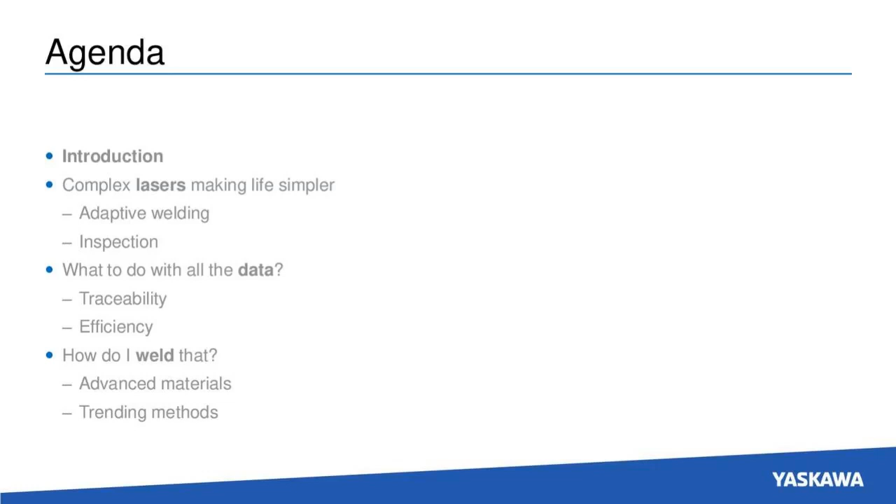So today's agenda: I'll do a quick introduction, and we're going to talk about complex lasers making life simpler. That's going to be in conjunction with adaptive welding and inspection. Then with those lasers and other equipment, what to do with all that data. OEMs are looking for traceability, and how to better make your line efficient. We're also going to dip into artificial intelligence and machine learning with that data. Lastly, we're going to talk about how to weld that - we'll touch on some advanced materials we're starting to see in the marketplace, and methods to join those materials.

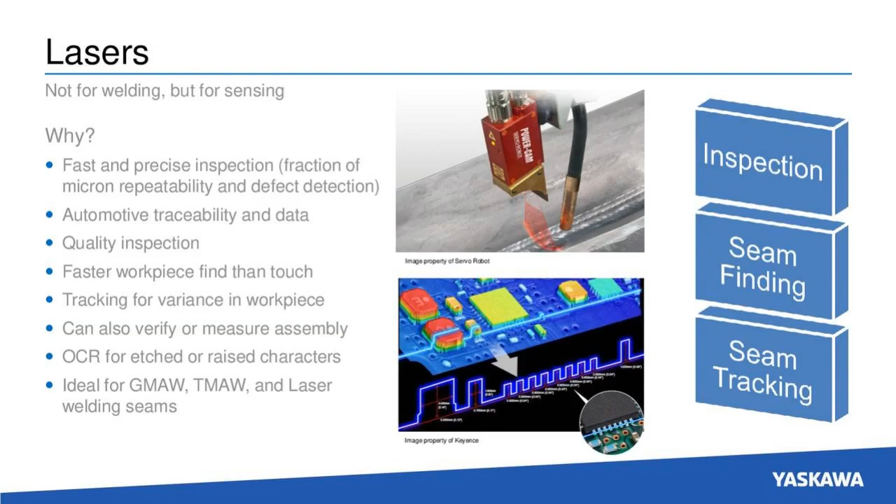It can also be used for verifying or measuring assemblies. You can see at the bottom here, the image showing the PC board. If there's a part that's missing, or if I have a box going down a line that's missing pieces inside, I can measure that with a laser to determine if a part is there or not. This is also ideal for just about any arc type welding or laser welding when you're trying to find the seams, track the seams, and measure those seams for quality.

So on these laser sensors, looking at the specifications, again I mentioned they're down to less than a micron of repeatability. It's the same laser used for inspection and measurement as it is even for weld line verification. Typically, it's going to be red, green, or blue lasers.

The blue and the green are relatively new to the market, and they aren't affected by the weld pool heat reflectivity. That infrared heat in the weld pool used to be very hard to track with a red laser without a lot of fine tuning. We can get around that now with blue and green.

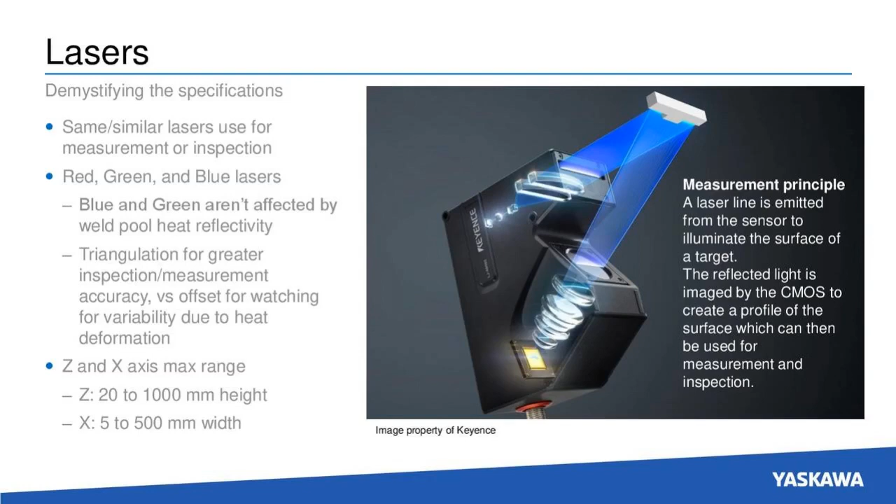They work by triangulation, figuring out what angle it's reflecting that laser back into the sensor at, to determine what it is that it's measuring and finding. You have a Z and X axis max range, typically from 20mm to about a meter in height, as wide as half a meter in width. So you can go from very small parts to very wide ranges of parts with these.

So here's a case study with laser inspection to give you an example. This was working with BWI, who's a strut manufacturer, shock manufacturer, and they chose a Vitronic brand laser. Now these lasers are mounted on the robot arm with the torch and the rest of the ARC equipment.

They grade each of these welds with these lasers after the weld is complete, but before the weld's even done, it verifies that the part's in place and that it's actually the correct part. If it's not the correct part, it'll sound an alert, give you a red light to show a no-go situation. But then after the scan, they get a grade. You can kind of see the HMI presented here in the middle of the screen, and it gives them a grade on each of those welds.

And they're looking for the profile, the length, the undercut, porosity of the weld, if there's any whiskers, cracks, and if there's excessive spatter. So that data is then stored for that weld, for that part. If the part is actually bad and it determines it does not meet those conditions, the weld torch actually comes back and blows a hole in the part. So that part is deemed useless, and then it tracks that the user, the operator, actually removes the part and then places it in a discard bin.

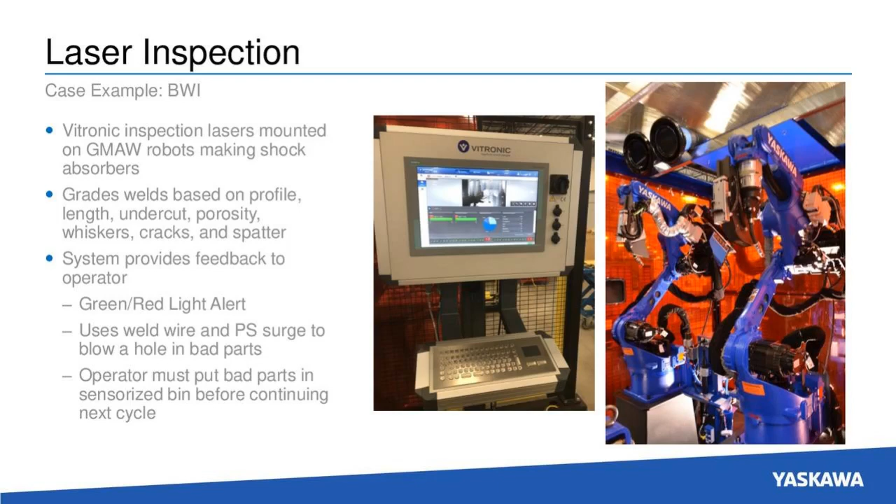So we have a video of that on this next slide here. Let's get these queued up. And it'll start playing in just a moment.

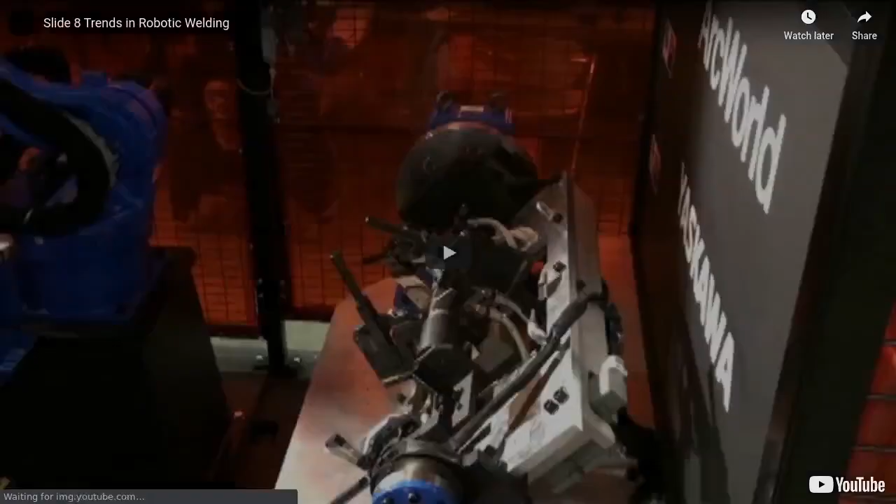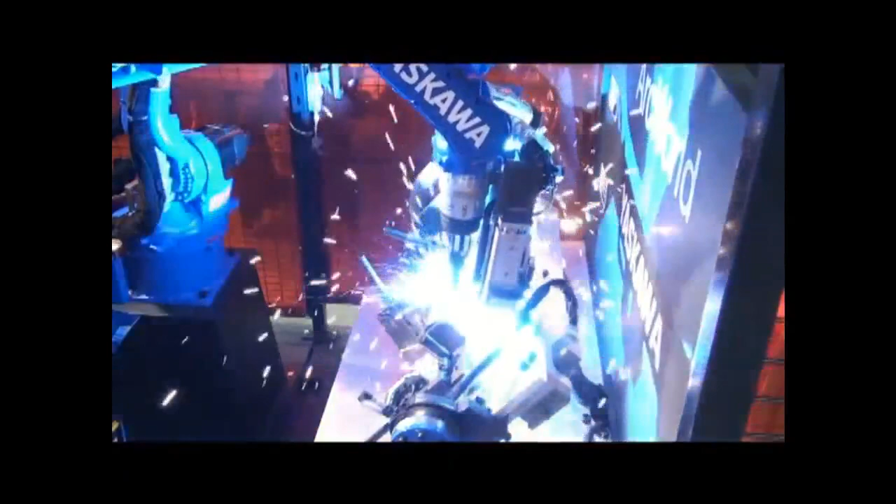So again, we see the part in place. This is on a small positioner inside the cell. We'll see the robot come down. The door of the laser opens briefly, checks the part, which was very quick, kind of hard to see in that video angle. The weld's made. Laser again comes down, inspects the weld on each of the robot arms.

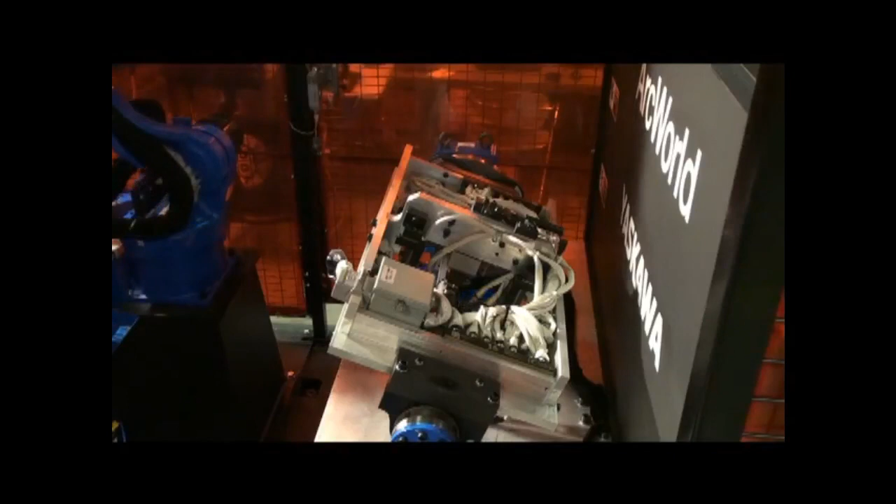And because this was in teach mode here, the positioner is running at a reduced rate for safety reasons. And then two-sided tooling actually comes back down inside the tooling. You saw briefly there a red beam before the arc started to verify the placement of the part. And then the arc, of course, starts to weld the part. And then we just had the second scan there on the other side. So at that point, the HMI would deem that those parts are good or bad.

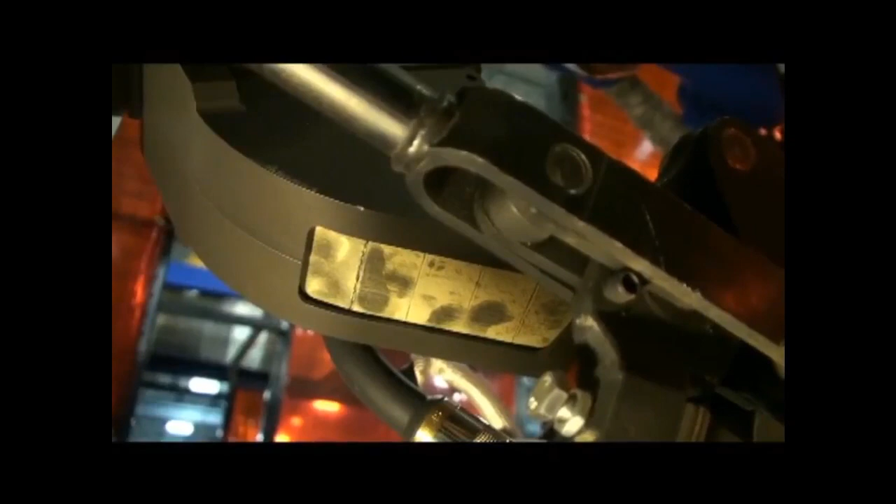And in a moment here, we'll see how those shutter doors work in this situation, because those sensors do need to be protected from that weld spatter, especially in a heavy welding environment. These are smaller parts, so again, just being more cautious when it comes to utilizing those shutters to protect the laser. Got another weld here. Here you can see that shutter and see what that beam looks like. So again, very quick process overall.

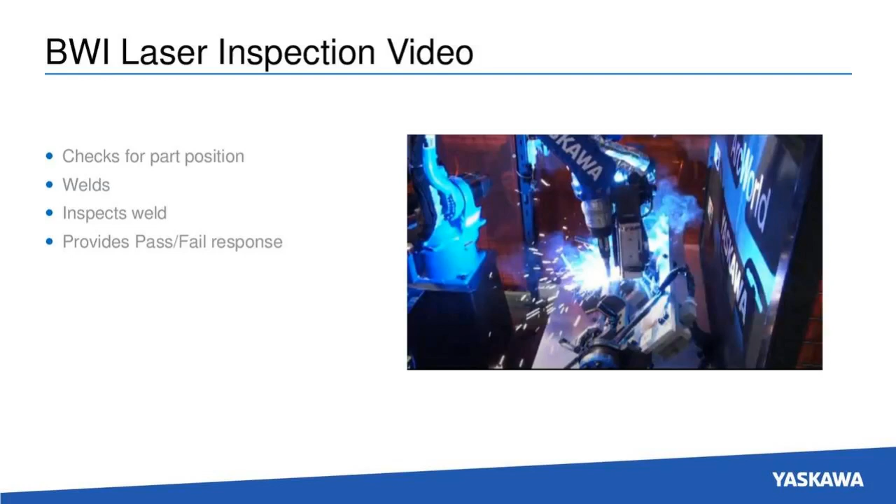To get back to our slides. So again, it checks for part position, welds, inspects the welds, and provides that pass-fail response.

Also, you can use this for part inspection, so not just welds, but checking parts are in the correct place in an assembly. So if I have different studs, for example, that come through, or screws that need to be present on this weld, I can track each model to determine yes or no, are those parts in place, and is this good enough? That's one of the tricks in this, though, is with any inspection, what is actually good enough?

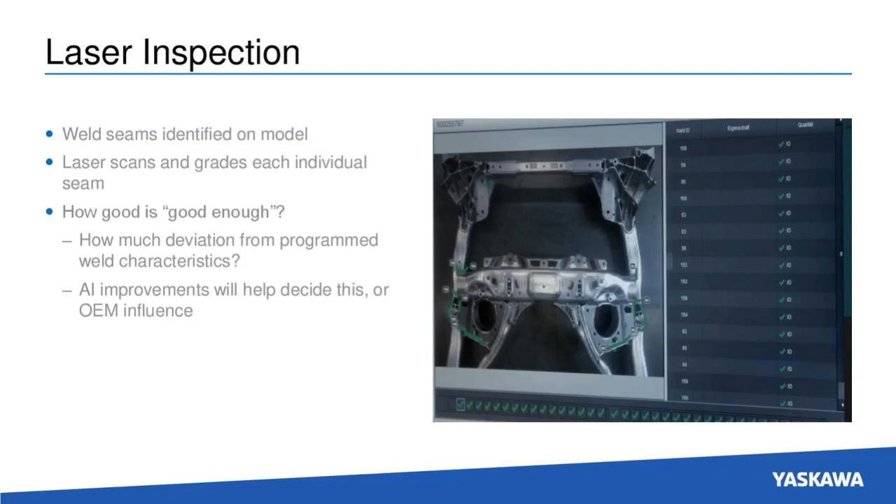So if I'm doing manual welding with a semi-automatic gun and I see my weld, I can kind of judge, because I'm a trained welder, if this is a good weld or a bad weld. Is my undercut right? Does the porosity look right? With the computer measuring everything, and because that laser is so precise, how good is good enough, or how bad is bad enough that I want to reject that part? So that's where some of the artificial intelligence comes into place to help the user decide, but also under OEM influence. I think we'll see more parameters coming from those OEM automotive manufacturers in the near future to help us determine, again, what is good enough.

So with those lasers too, we can do what we call adaptive welding. That could be as simple as that wire touch sensing, to a little bit faster with a pinpoint touch on the laser, more simplified laser. We can use camera systems, or we can use, again, like what we saw with that laser sensor before. And that is to find the seam in place to make sure I'm starting in the correct position. And then I use a relative job function to actually shift the entire job point to be in space where I need to be to complete that weld job.

On the other side of that, we have what we call seam tracking. I can do two different pieces here, using that laser, what we call on this slide the MotoEye LT, to actually track if that seam is changing while I weld. So if I have any heat deformation while welding, the relative job and the shift will actually affect the weave and jog of the robot as it's welding.

I can do the same thing also through Com-Arc, which is arc seam tracking. I'm actually measuring the gain and drops in voltage and current to make sure I'm staying tight inside that weld seam.

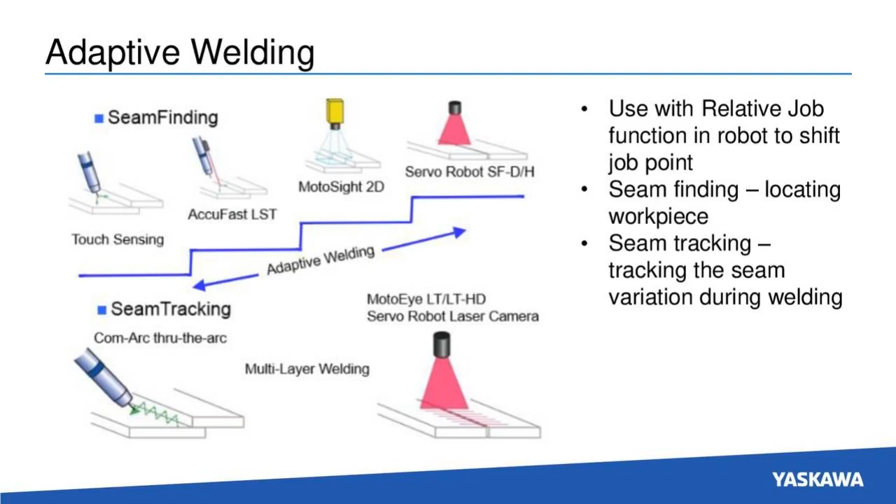So we have all that data from the lasers. I have scans of the welds to make sure they're good or bad. I have information coming out of the robot controller and other equipment. What can I do with all that data?

You're probably familiar with the Industrial Internet of Things, or Industry 4.0. This is bringing together all the factory automation we've worked on for a couple decades into more of a smarter space. All of that equipment is creating data. It's giving me process times, part counts, weld parameters, and consumption rates of consumables. So I break that into 4 sections here, as you can see in this graphic.

If I look on the right, efficiency. Are my machines running efficiently? Are they doing what I think they're going to do in a day when it comes to cycle times and part production? I can also look at uptime.

It could be an efficient machine, but if it's constantly having to stop for some reason, be it maintenance or operator error, I'm losing money on any of that downtime. So I can prevent that downtime and ensure uptime with that data.

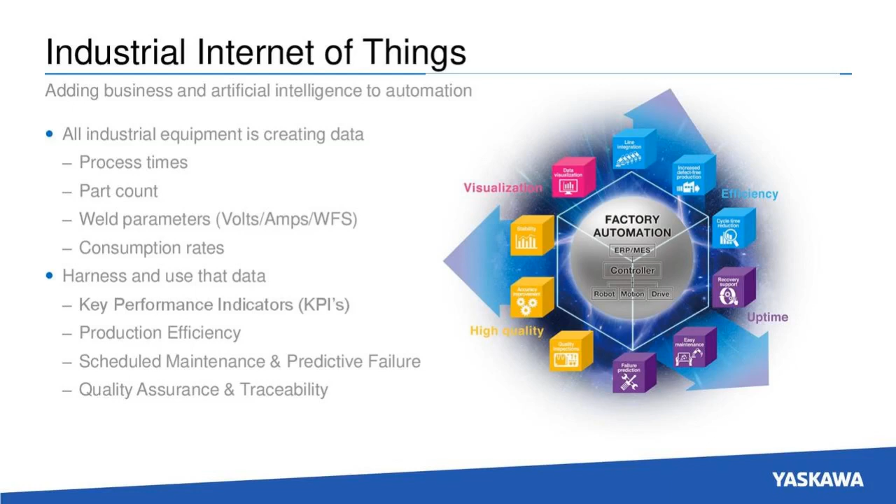I can also measure quality. If I'm scanning parts and determining if they're good or bad, I can give myself quality assurance on those parts. I also provide visualization through this data. Just as you're used to seeing charts and graphs of performance, I can visualize that data from my machines in different charts and graphs to achieve different KPI targets.

To give you an idea what that would look like, Yaskawa's product for this is called Cockpit. There are lots of different industrial products out there though. They all kind of work the same. One of the major differences is whether that data lives locally or if it's always sent to the cloud. In the case of Yaskawa Cockpit, it is locally stored and then sent to the cloud as needed.

So in this case, we have an assembly line. You can see the controllers, the robots, servo motors, AC drives all being used. All that's creating data, and all that data goes to Yaskawa Cockpit. Cockpit collects that data on a server, and then I can at that point either execute on that data or send it to the cloud for further application.

So execution at that point might be defect monitoring or preventative maintenance, for example. If I know a servo motor runs so many hours and is going to need lubrication at some point, I can have planned downtime for that lubrication.

With that data, I can do the analysis and monitoring locally or send it to the cloud. With the cloud, I can implement something like IBM Watson or other analytics to determine if something is up to par that it needs to be. If it's not, what tweaks can be made based on the data it's seen in the past. So if it noticed that a parameter changed versus a cycle time change, how do those influence one another, and how do I make changes to my production to increase production overall?

That also can come into play with machine learning, which you've probably also known as artificial intelligence. So if I have a scan of a part and that data, I can send it to the cloud. If I have an algorithm and artificial intelligence in place that determines how to weld that part based on the shape and size of the seams, it can also then generate a program, perhaps, and send that back down to the robot to execute.

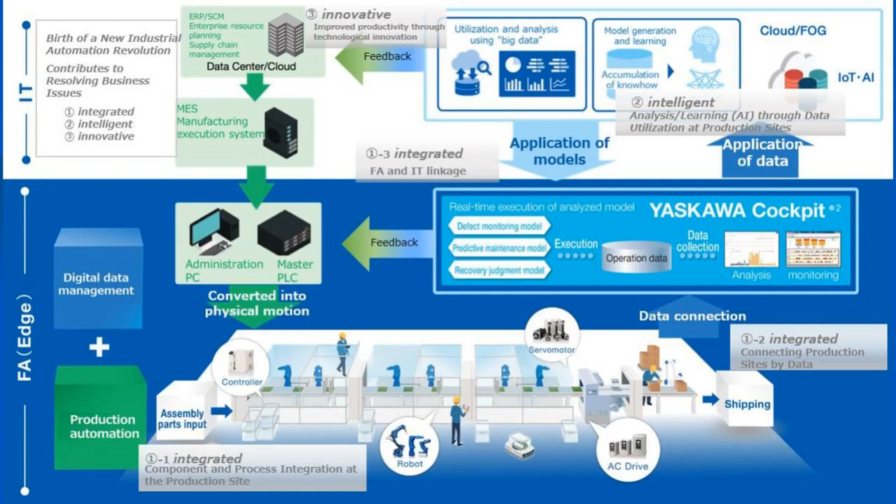So you see that here, from feedback down to the data center, in some cases back down to either the PLC or directly to that controller to execute the feedback that's been provided. So lots going on with the data, but kind of endless opportunities with it.

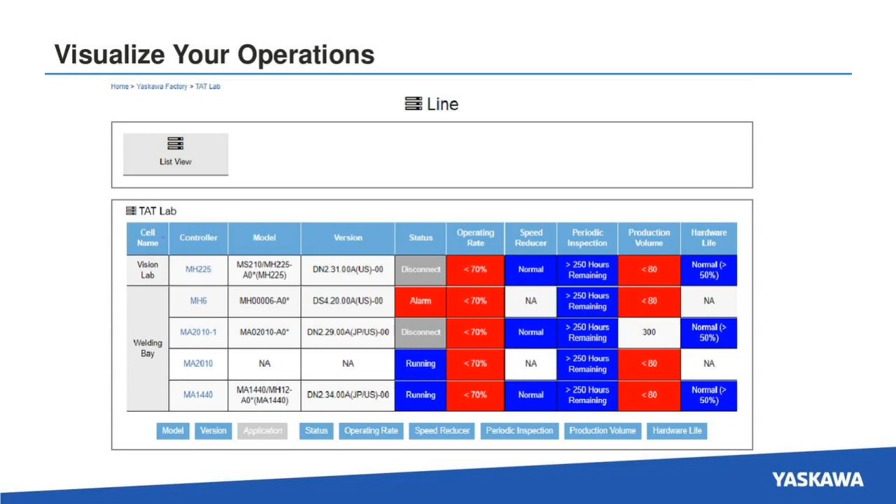Again, looking at Yaskawa Cockpit, what that looks like on a local simplified level for visualizing your operations. Here we have an example of what we call our TAT lab, which is our demo lab if customers come in to check out their parts or solutions we've made for them. Here's a variety of robots currently in that TAT lab. I can see in the vision lab versus the welding bay what controllers are being used, what model robots are being used, and the status of that robot, operating rate, and so on. So at a glance, I can see the status of that robot.

Again, our server lives locally, so in this case it's going to be in that TAT lab or somewhere on our premise. I can have multiple of those servers, and I can connect those to a mail server if I don't want that information leaving the factory. The majority of our customers don't want that information going to the cloud; they want to keep it local for security reasons. But I could connect that to a mail server so if I want alerts to go out, but not any other data. That mail server will give me an alert on my phone saying there's an alarm on a certain robot, or maybe a cell that's not meeting specific targets. This is all controlled by that mail server.

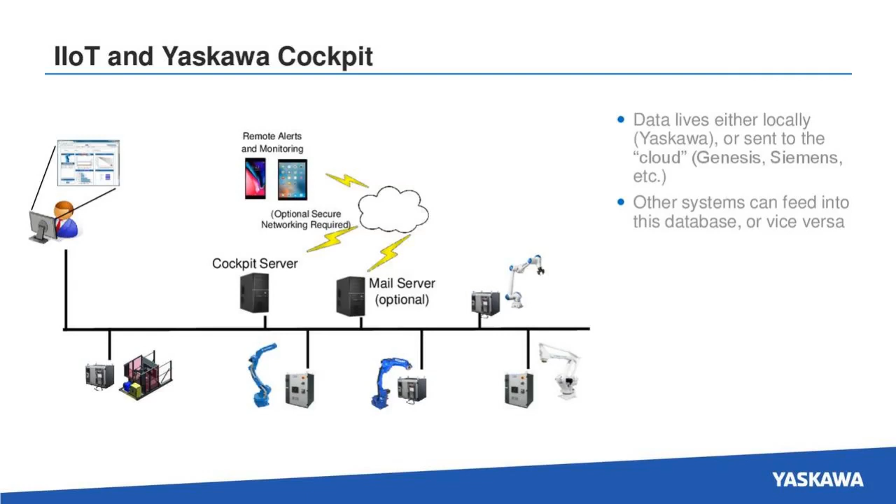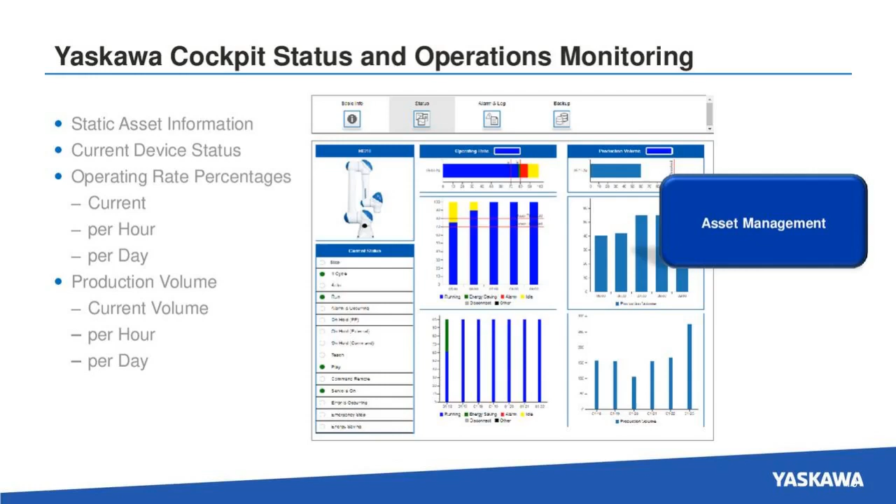One of the benefits of this is asset management. Again, is that robot doing what I expect it to be doing? Is it idle a certain amount of time a day? Is it actually operating a certain amount of the time? I can also see my production volume and operating rate percentages. I can get into maintenance analysis too, as far as, am I seeing too much torque on a reducer that I know is about to fail over time? So I've had this robot for 12 years - do I just go ahead and disassemble it and replace all the parts, or do I wait until failure? This gives me an idea of when those failures are going to occur.

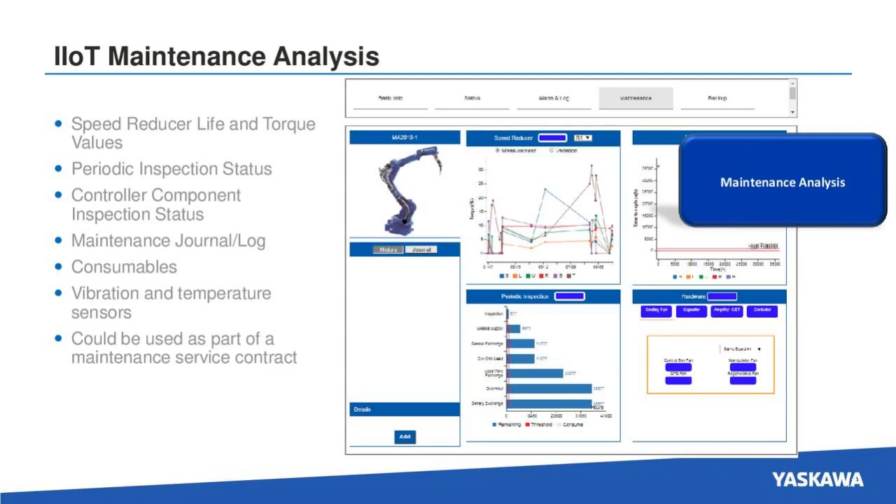This could also apply to consumables. On a welding robot, I have weld wire and gas. I can track how much weld wire I'm using, or if I know I have so many pounds or feet in a barrel, I can count that down. So I have an alarm that can go off to warn me my consumables are about to run out. Same thing possibly for paint, adhesive, or anything I'm going to run out of that could cause downtime - again, preventing that downtime from occurring. I could also add vibration and temperature sensors. If I'm seeing excessive vibration in a positioner, that might tell me something's going wrong, so I can prevent downtime by having it more planned. A lot of issues can be cured before they ever happen through that maintenance analysis.

I also have alarm notification with Yaskawa Cockpit. Just as you get an alarm on the robot pendant, that's going to pop up in Cockpit. I can have that notify an individual that something's wrong, and I can also look at those alarms and the alarm history. If it's a recurring alarm that's continuing to cause that robot to not meet its targets, I can see what's causing that. It gives me details and timestamps. I can even track logins to control what alarms are going off and who's using the robot, so I can maybe get more information from that person about what's going on.

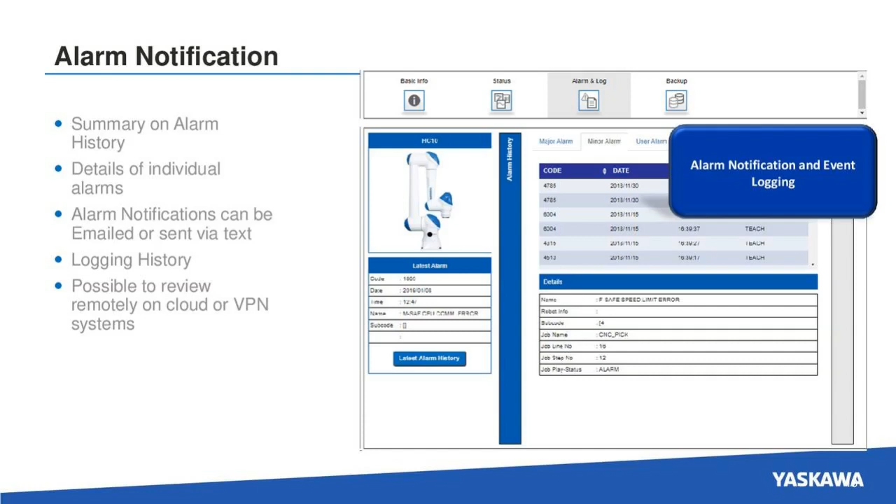A popular aspect of Cockpit, also available with similar services from other companies, is backups. I have all this data stored locally in the controller, and data stored in the server. I have all my jobs that are constantly being tweaked possibly by the operators. I want to back that up from time to time. Like other services, we have different add-on functions - for example, we already have pre-built ARC monitors and oscilloscopes. It's OPC UA, perhaps a Miller power supply or a Fronius power supply, feeding that data into the robot controller and feeding it into Cockpit.

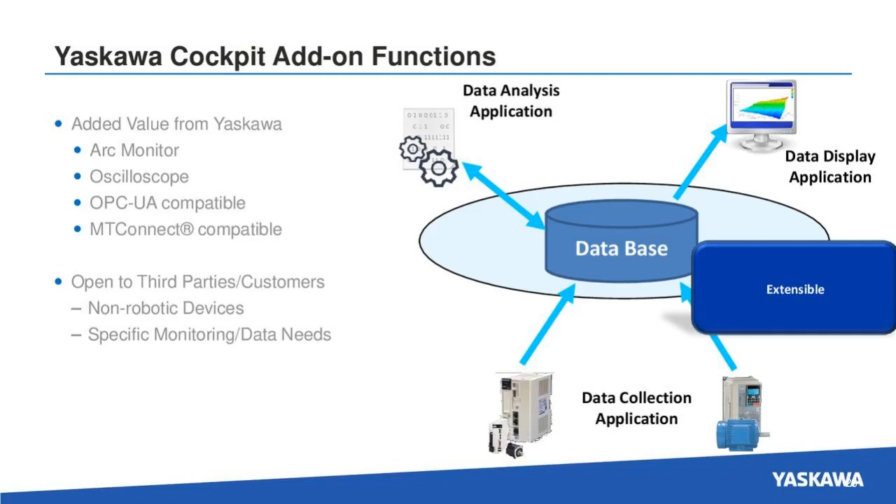So here's an example, we take this cell to trade shows typically. It's our beer serving robot, very popular for trade shows. In this situation, it was serving two different types of beer, Blue Moon and Sierra Nevada. I could see, as far as what each guest chose, how that depleted the kegs of beer. In this case, it looked like Sierra Nevada was either more popular or Blue Moon just got replaced.

So I can see popularity of each, I can see the analytics of how many beers per hour I'm serving. I can also see when that keg's about to go empty, so with planned downtime, I can replace that keg before we're out of beer. Kind of a fun application, but it gives you an idea of what that visualization looks like.

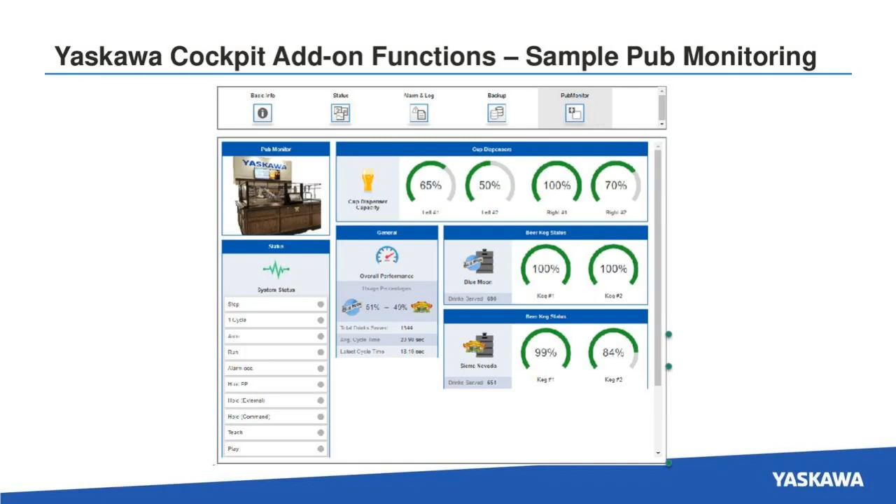Here's another demo we had at the trade shows. This was from our Drives and Motion side of the company, and this was a 3D printer. From that 3D printer, I'm getting data from the extruder, what the temperature of that extruder is, if it peaks, what the average is.

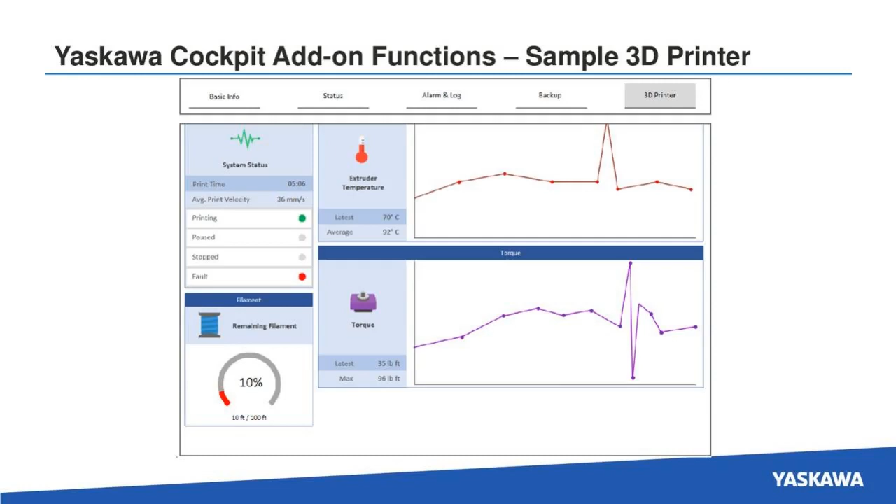If I know something's possibly going wrong with the 3D print, I can look at that temperature to say if maybe it's too hot or too cold, and tweak that to make sure the print quality is better. I can also see my consumables, how much filament's remaining, so with planned downtime, I know I need to replace that filament in so many feet or prints, to make sure I don't get an error or scrapped part down the line.

I mentioned support for OPC UA. So other devices that support OPC UA, the cockpit acts as a server, and you can retrieve that data and utilize it through any custom web API you might want to build.

So with that data, I mentioned machine learning and deep learning, artificial intelligence being the umbrella term. Basically, I'm getting that data, preparing that data, and training a model. I might have a model trained with many failures, for example, of how to pick up a round apple versus a long banana with the same set of grippers. That's all done through simulation. It tests that data, then improves the simulation output after each run. That's the gist of machine learning.

We use this with IBM Watson. We can actually use this for grading weld seams, which we'll see in a moment. Based on the sound of the weld seam, and what we know a good weld seam sounds like versus a bad one, does it meet that sound signature profile? I could also scan a part with one of those lasers, determine where my seams are at, and based on models and simulations it's already run, figure out the best approach for welding that part.

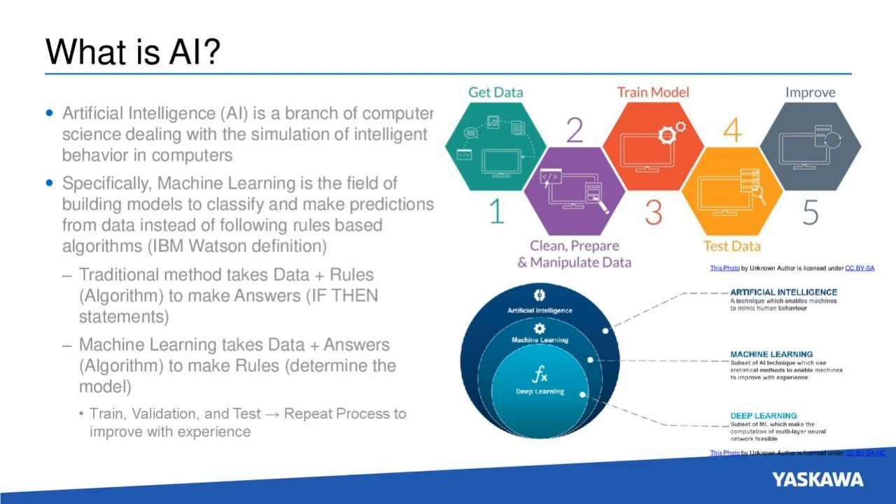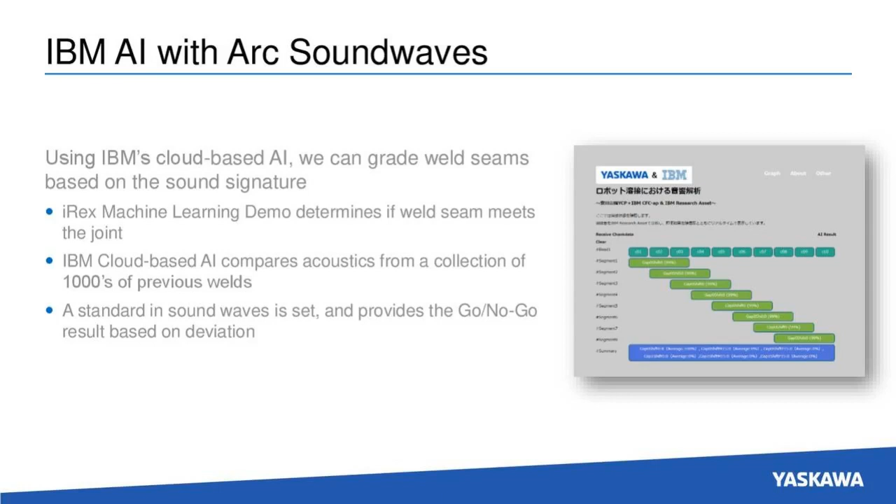So here's that IBM artificial intelligence using sound waves. This was a demo we had at IREX in Japan last year. We'll be showing it at our trade show demo at IMTS and FabTech this year, assuming those shows still go on. A weld makes a sound, and if you ask any trained welder, does that sound like a good weld or a bad weld, generally they're going to know. Yes, there was a lot of popping, maybe a lot of spatter, a lot of porosity on your weld, or no, that sounded pretty good. So we're going to see a quick demo of this.

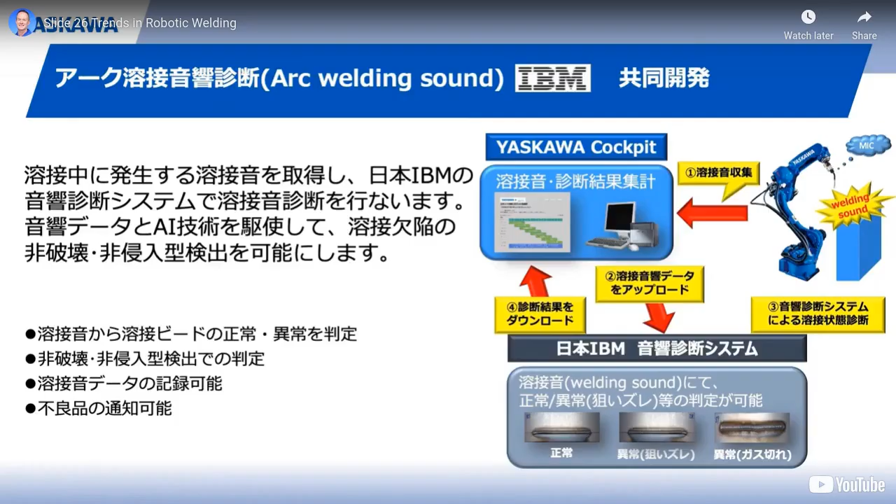And this demo is in Japanese, so I'll try not to translate, but narrate what's going on.

This is being run through our Yaskawa cockpit, and they're going to actually create a gap in the weld here to determine the different sound quality that's going on.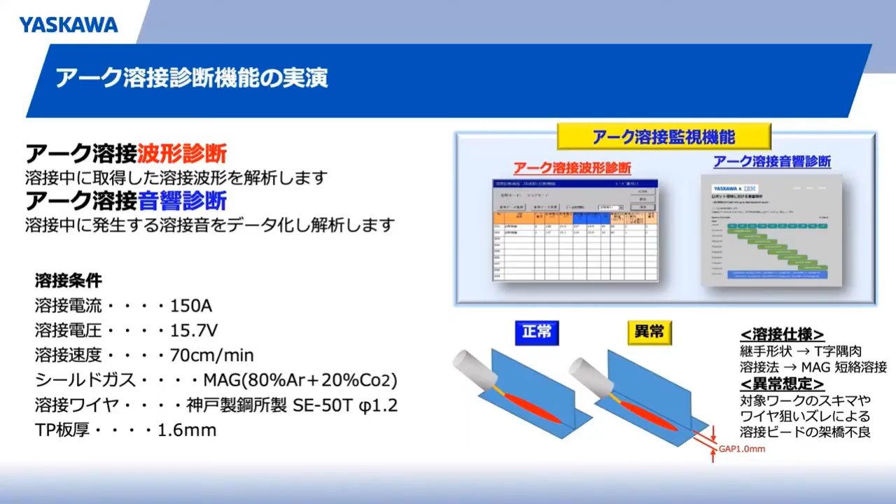So the first robot's going to do the good weld, and that's going to be the weld fully in joint.

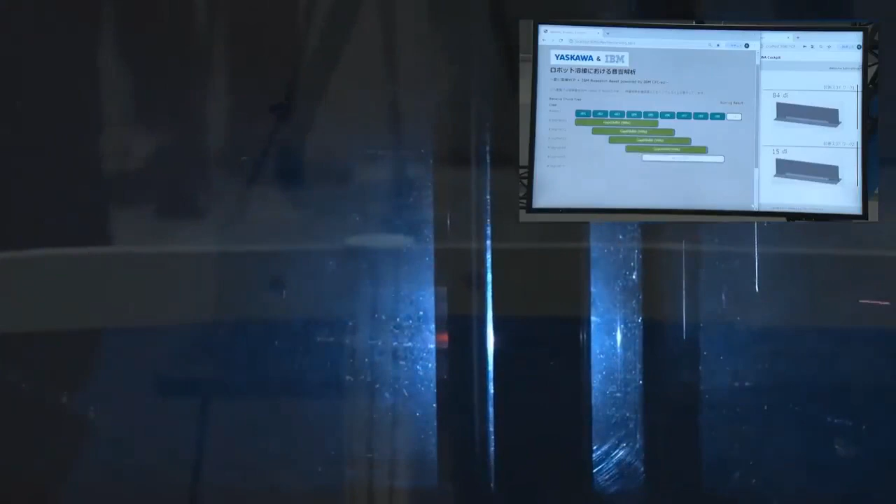You can see on the screen as it's measuring that sound signature, it's going to start grading those lengths of weld. So simply based on that sound signature, no lasers, it's determining that's a good weld.

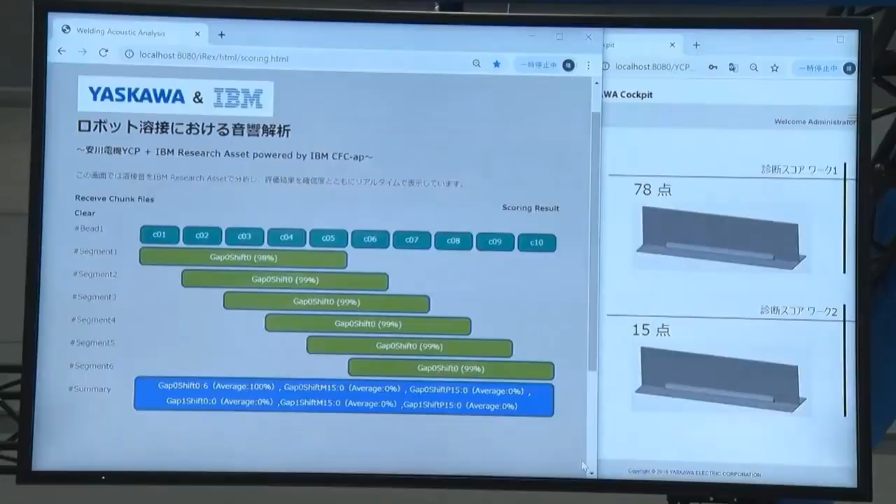The second robot, everything's been shifted a little bit, about a 1.0mm shift, so it's not fully in joint. That sound signature is going to sound different if it's not fully in the correct weld joint, and you'll see those fails start to come across the screen.

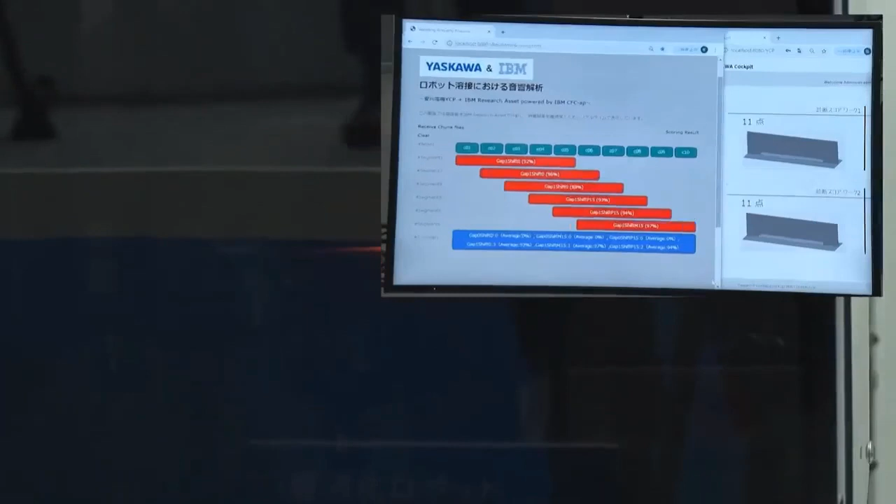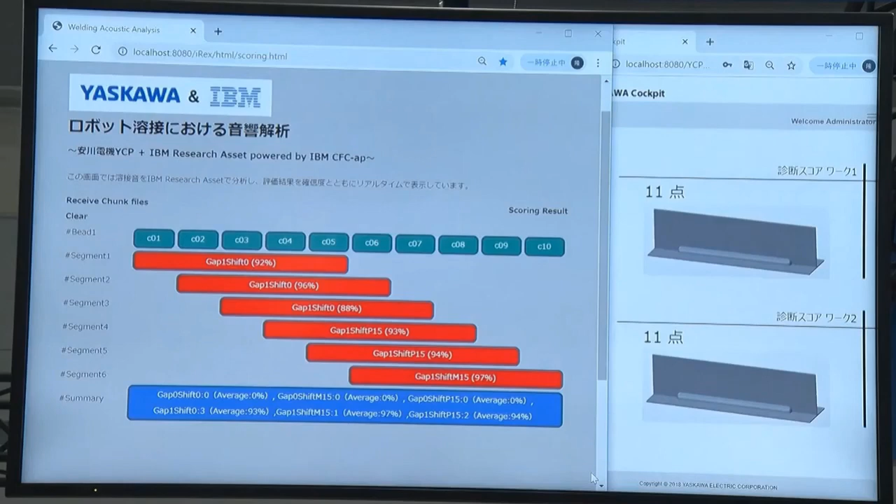Now, in a real life environment, you might mix that also with a laser, and that laser will be able to measure the porosity and such, to say, okay, it sounded like a good weld, but was it really a good weld? What other parameter can I use without doing a destructive test?

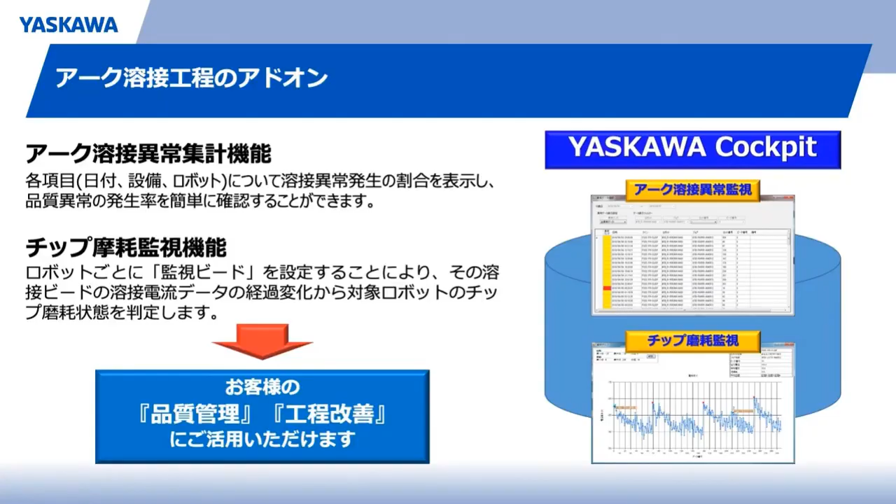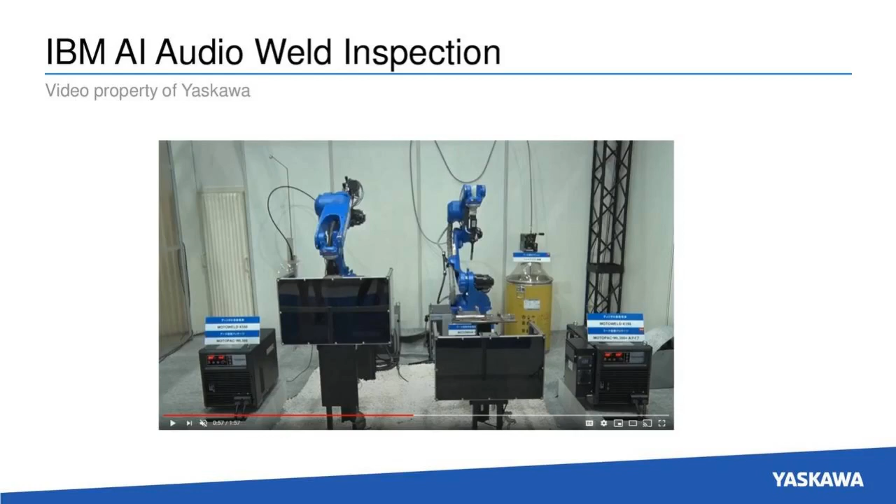So if I have to show traceability for an OEM manufacturer, I'll be able to have that traceability available, to show them here was one factor we used to demonstrate that this was a good weld versus a bad weld.

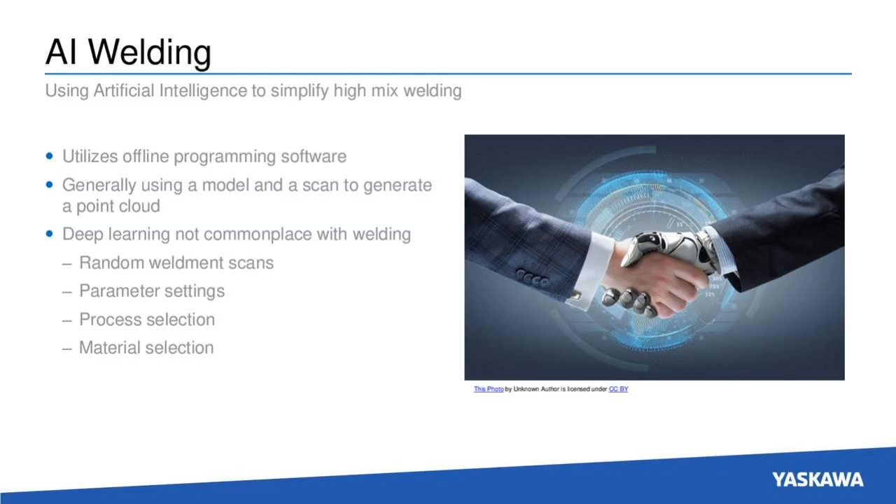Going one step further, this is the creme de la creme when it comes to robotic welding. How can I just throw a random part at a robot and it knows how to weld it? This would utilize offline programming software, such as a simulation software. It's going to scan the part and generate a point cloud, and then set the correct parameters based on the material being used, the thickness of the material, and what type of weld it is. We have a partner that does this called Path Robotics. They're still in a lot of R&D phases, but they have a few pieces of equipment out in the field, and we have a video to show you how that works.

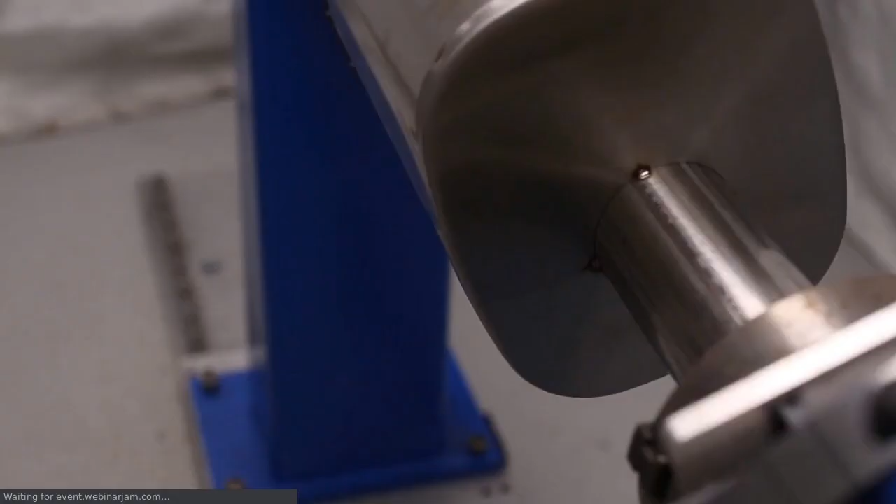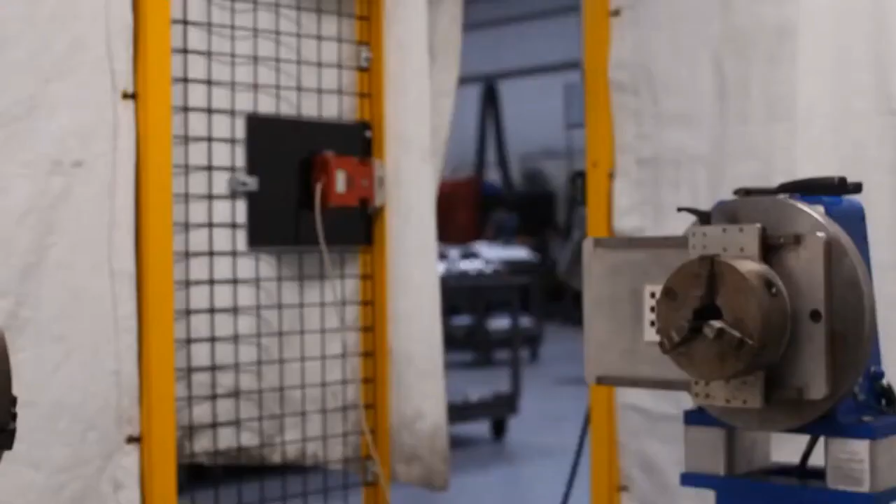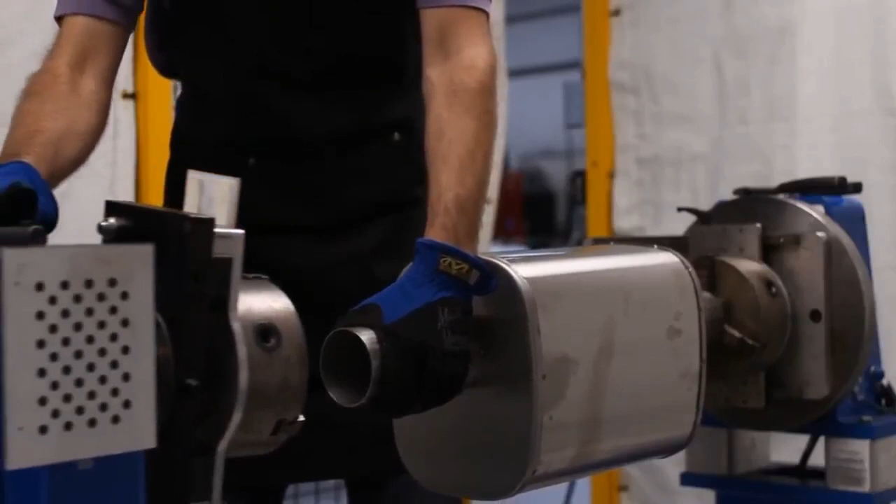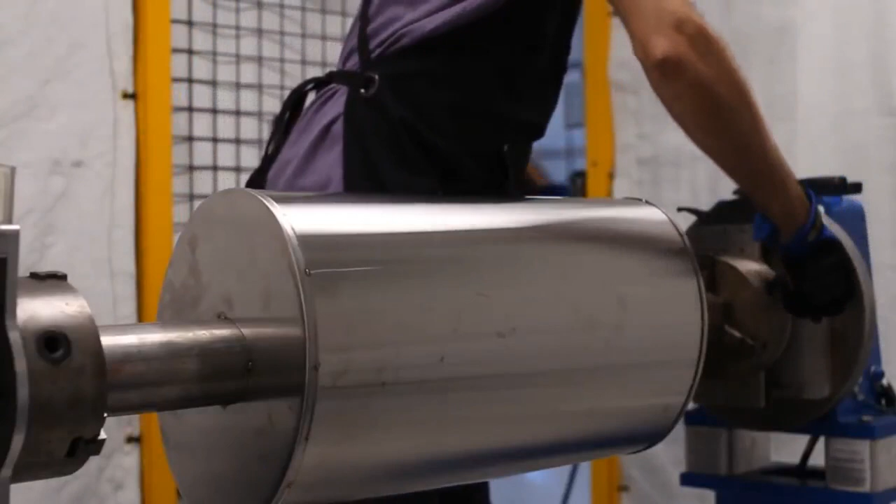This customer is doing exhaust systems, the muffler systems. This positioner is adjustable in width, so you can easily adjust any width of these muffler exhaust systems. You can see different sizes, all about the same idea though. I have a tube coming into a plate, and that's what the laser is going to be looking for. I also have the outside cavity that's been tack welded, thin gauge steel. What do I need to do to be able to follow that seam all the way around, especially on these oblong pieces that you see here?

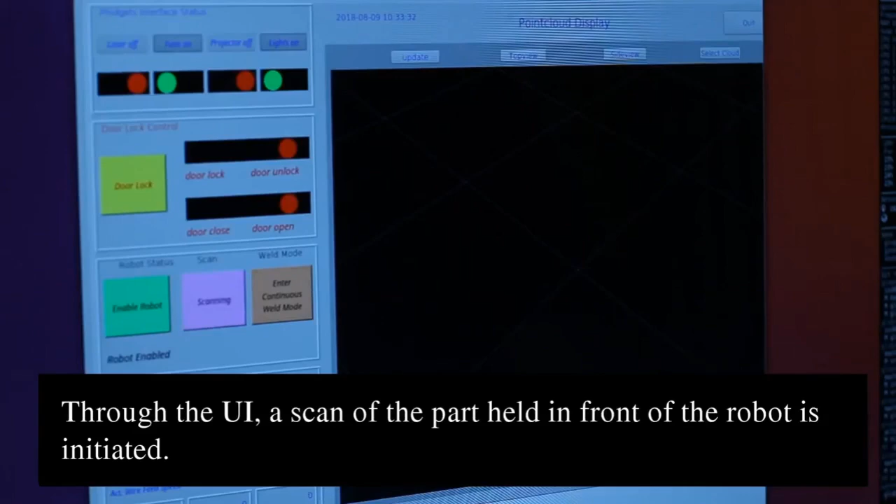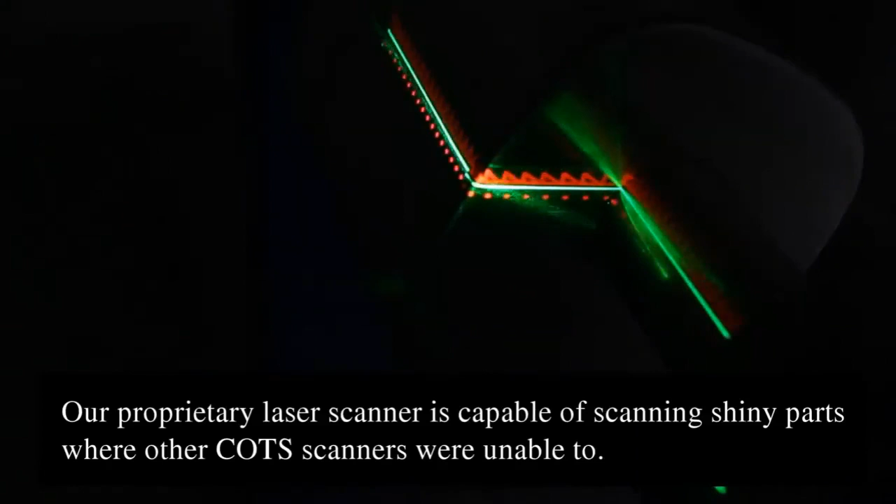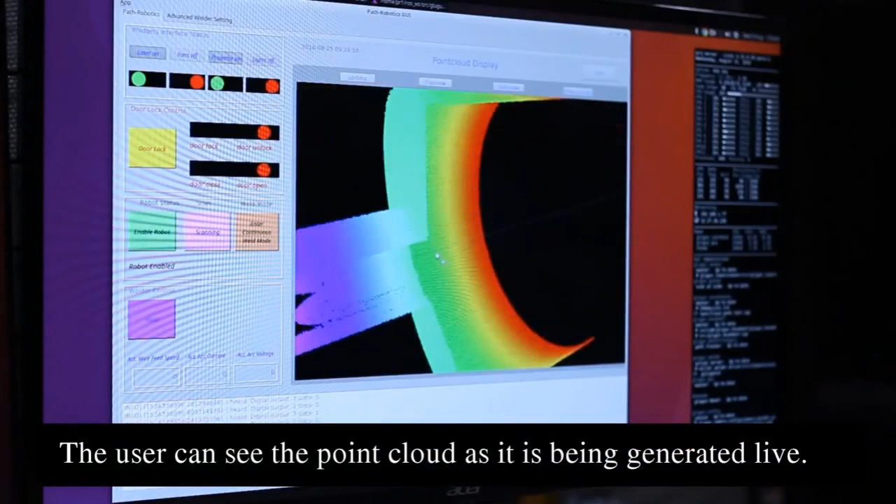It does have to be in a dark environment for this system in the cell. You see the lights go out, it does its scan, it rotates that part, and it finds those seams. They are using a red and green colored laser system. I mentioned before that green is good for reflectivity as well as if there's a hot spot on it.

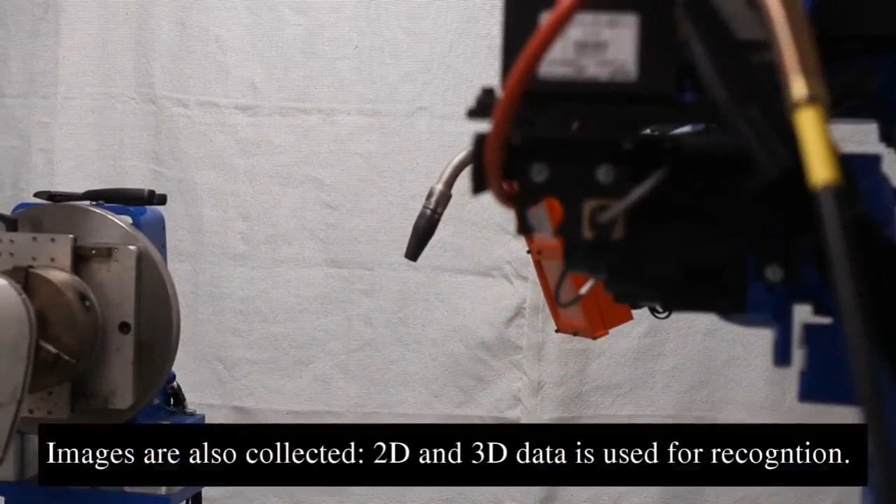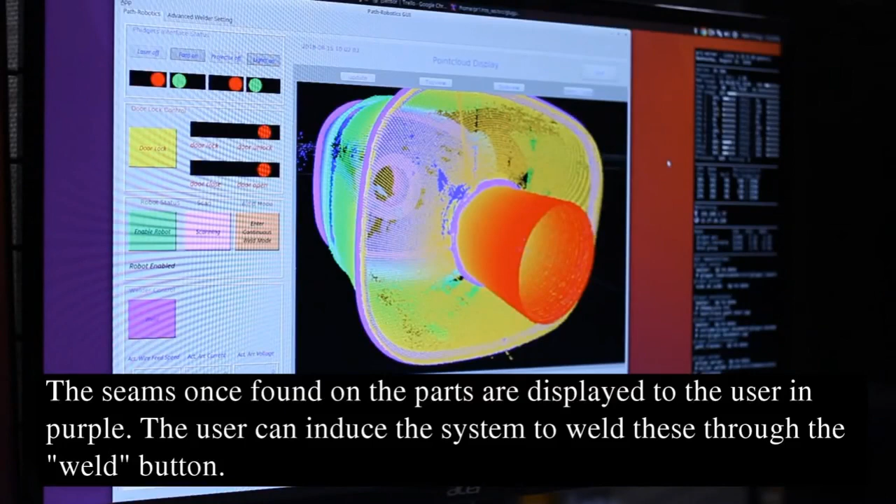You see it generates the model, and then their software is detecting where those seams are at in those models. You can kind of see in purple, it's highlighted there. In this case, the user has a chance to verify, is this correct or not correct?

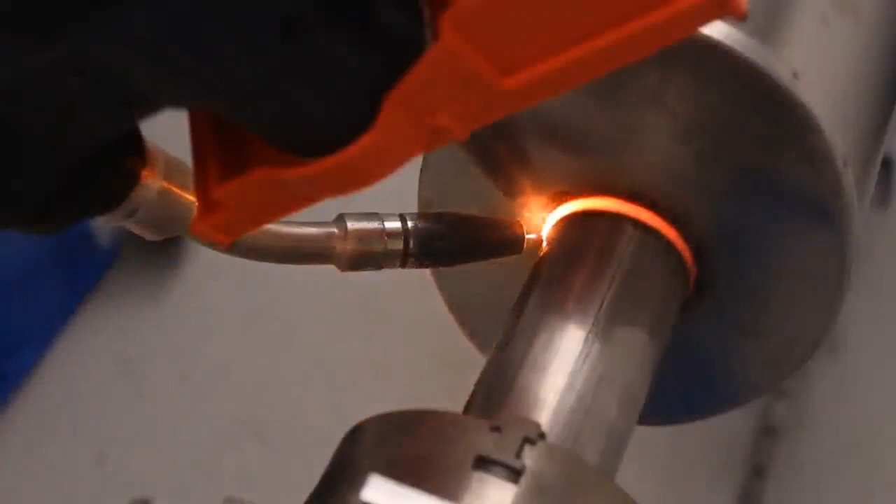Simple MIG setup. Torch comes in, positioner does its part. That's a Yaskawa positioner and robot, so you have coordinated motion between the two using the same robot controller. So your repeatability is going to be perfect every time.

So that was the inside, which is a little simpler because it's always going to be a round, tube to plate. But here we're going on the outside for this shell, and that's an oblong shell, but it's still able to weld that part.

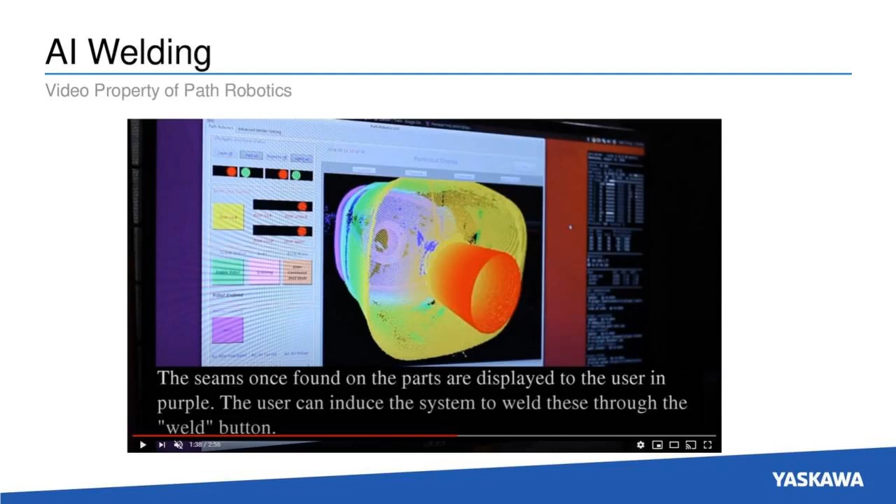So that's one application of AI welding. I've seen other similar systems, many using our robots, but same idea: scanning a part, generating a point cloud, and then through some secret sauce on the software, able to generate what that weld's like. So the last portion of our webinar today is how do I weld that?

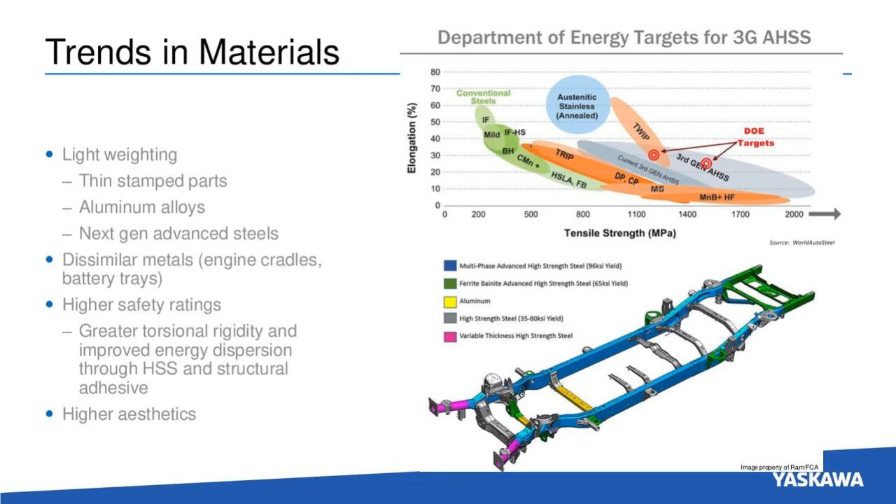Trends in materials we're seeing, especially in the automotive market where a majority of robots are used: second and third gen steels being used, new aluminum being used, but the whole idea is either lightweighting or stronger materials. With lightweighting comes thin stamped parts out of steel or aluminum. We're seeing a lot of different aluminum alloys being used, and again those next gen advanced steels. Also, we're seeing more and more dissimilar metals, such as engine cradles and battery trays, and we're required to meet higher safety ratings. Along with that, the customer wants something that looks nice, so higher aesthetics as well, if it's any exposed welds.

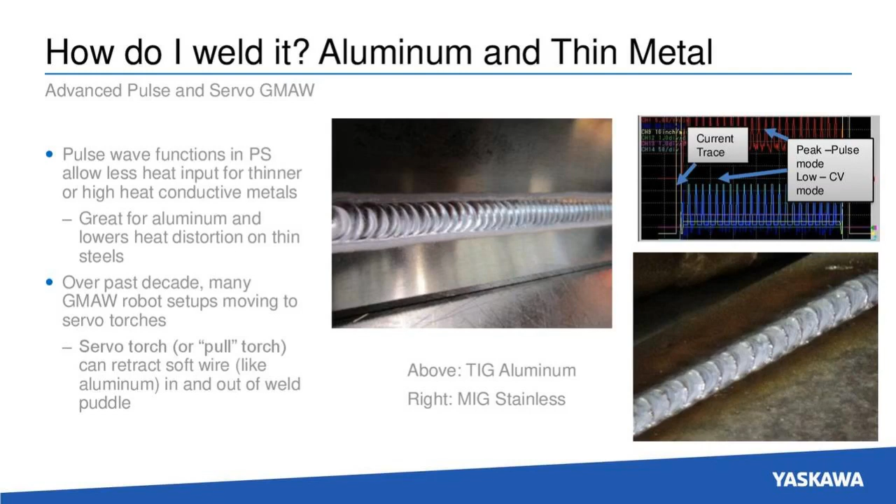More and more, though, the power supplies are getting smarter. You're seeing more and more servo torches being used, which actually dip and retract that wire in and out of the weld puddle. So you can get a higher cosmetic, more controlled depth, and more controlled energy heat input on that weld. There's a nice video here by one of our partners, Fronius. They call it cold metal transfer, so I have a lower heat input, which is ideal when welding materials like aluminum that have a very high heat dispersion rate. Let me pull the video up again.

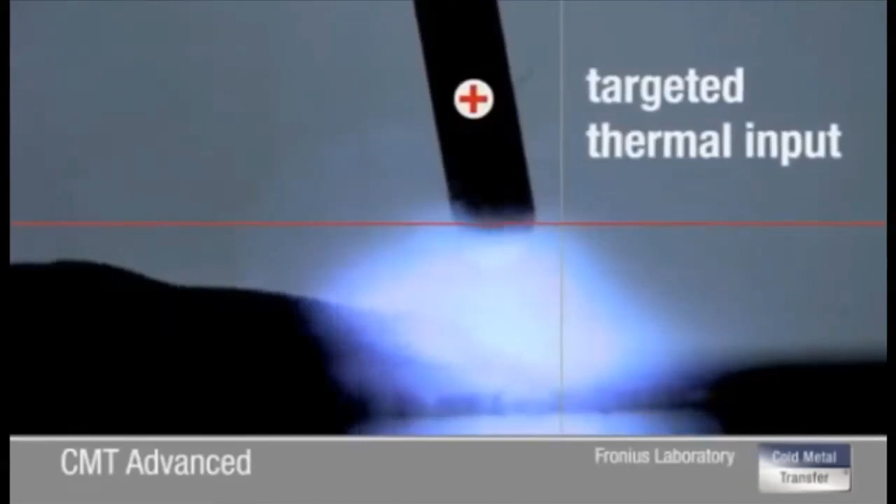You'll see here what that retract looks like from that servo torch. In CMT, the wire motions are fully integrated within the process. In addition, CMT Advanced also reverses the polarity in the short-circuiting phase. The arc remains stable, and the deposition rate is up to 60% higher.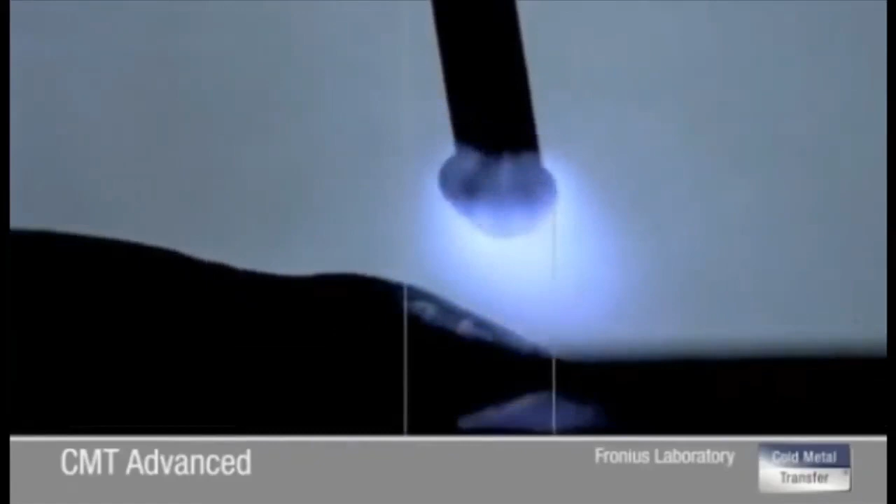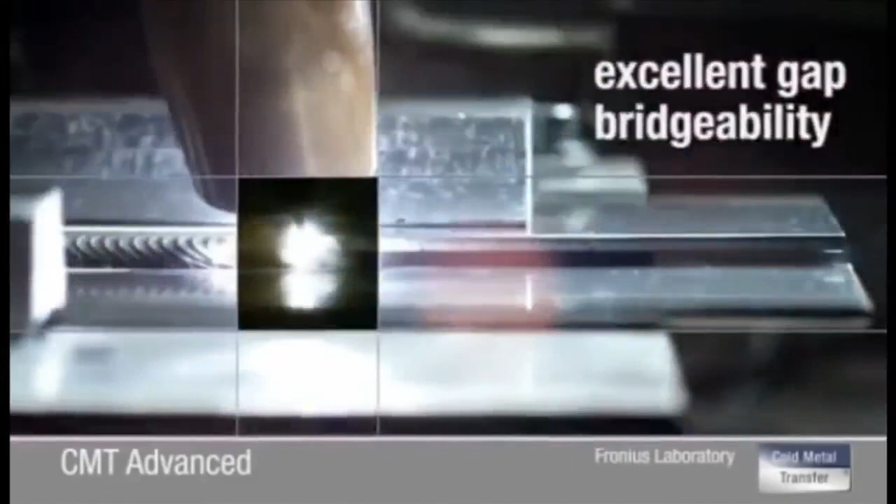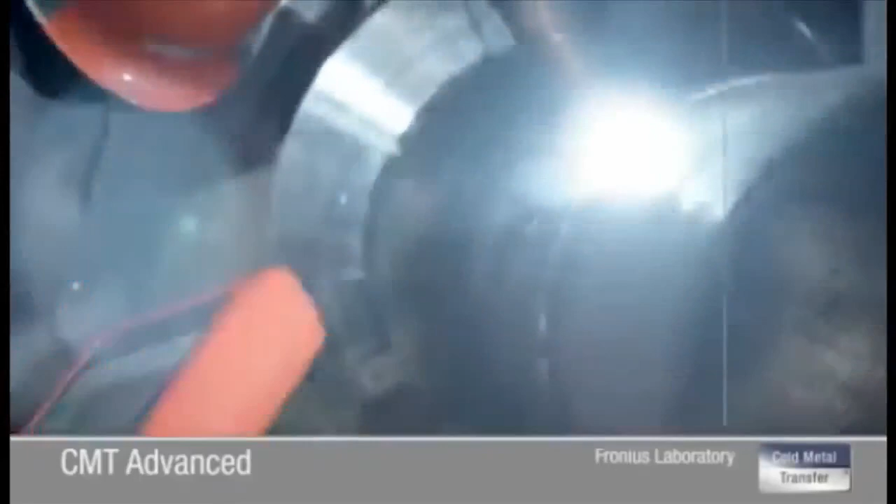Combined with positively charged pulsing cycles, the process makes it possible to join super high-strength steels with complete process reliability. That's CMT Pulse Advanced. Another advantage is excellent gap bridgeability on light and ultralight gauge joints. Lower thermal input means less dilution of the base metal. This is a great advantage in weld cladding, with huge potential savings for users.

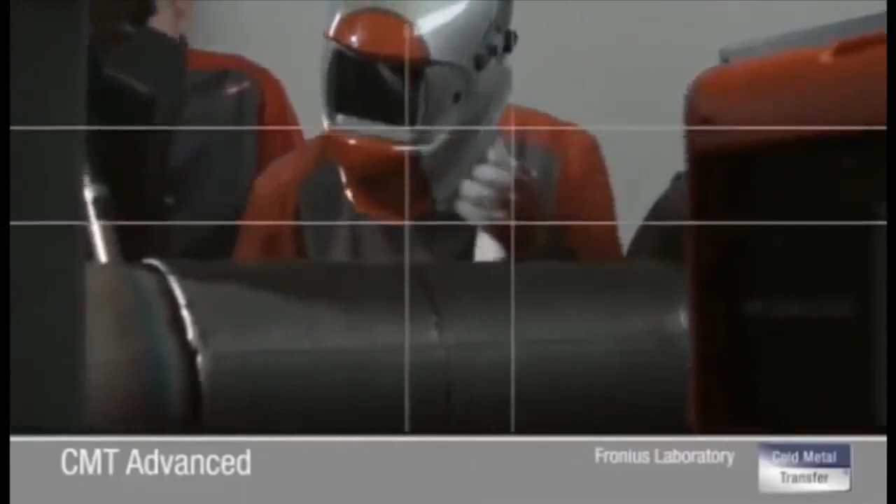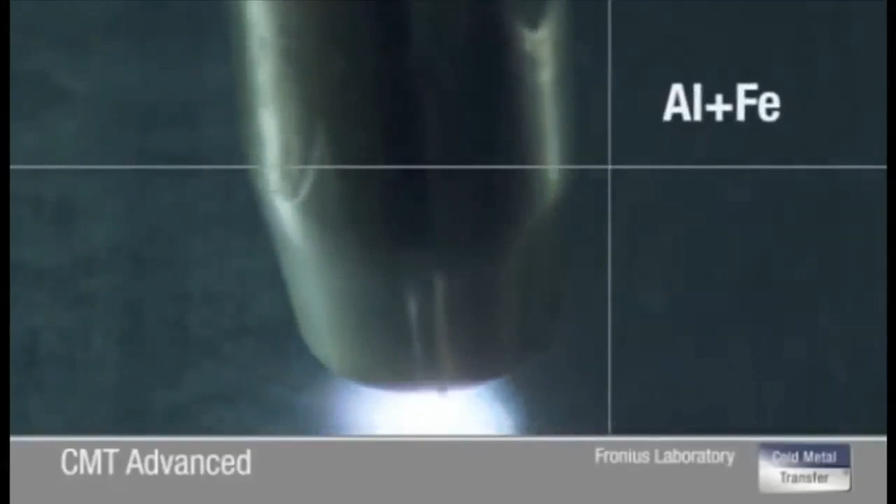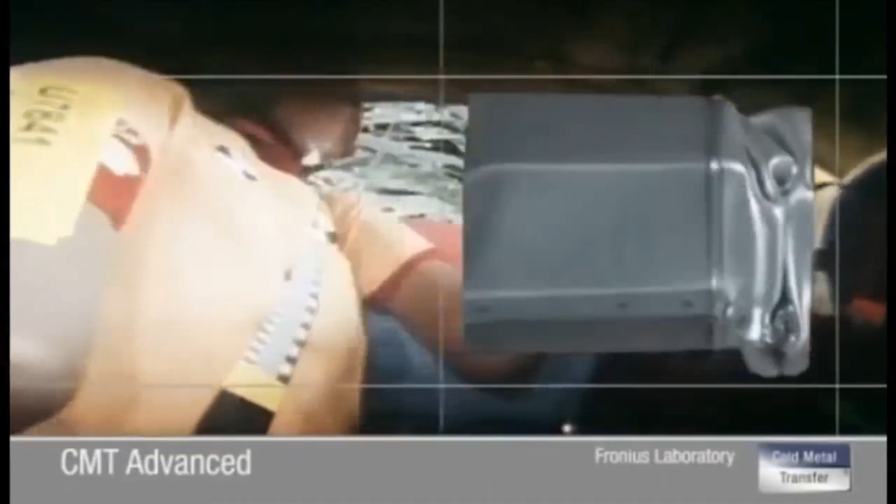With CMT, Fronius is doing pioneering work: spatter-free welding, reliable steel to aluminium joints, crash test safe, making the impossible possible.

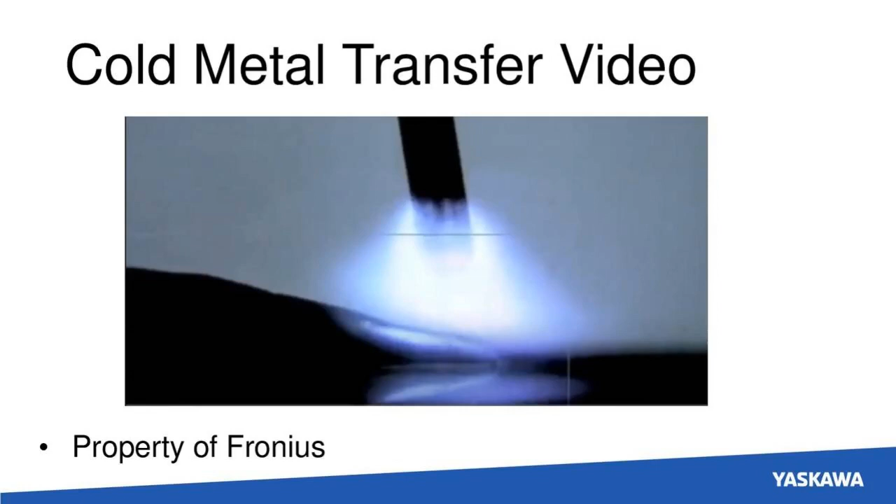So again, heavy Fronius material there, but most of the power supply companies have a version of this now through different servo torches. They each kind of specialize in their own materials and markets as well. But I know SKS, Miller, Lincoln, they all have different versions of this, but it kind of gives you that same idea of how those servo torches and pulse processes are working and providing new ways to weld things, even with just a MIG process. So lower cost than some of these others that we're going to look at.

So also looking at aluminum thin metal, laser welding is becoming more and more popular as the cost comes down, but it's still a very expensive process. We'll typically have a customer ask us about laser welding and get a little bit of a sticker shock on it. But for some materials, especially in aerospace, it is the best process. So ROI is going to be much simpler in that case.

Most popular with that is remote laser using a wobble head, and that's going to be inside a light-tight enclosure. So the robot's going to be doing some of that motion, but most of that weld motion and precision motion is actually occurring inside that laser head. So a little reflector prism aims that laser to the part, and there's, for example, built into the Yaskawa software, a way to calibrate that. So again, you have that extreme precision coming from the laser head and the combination of the robot.

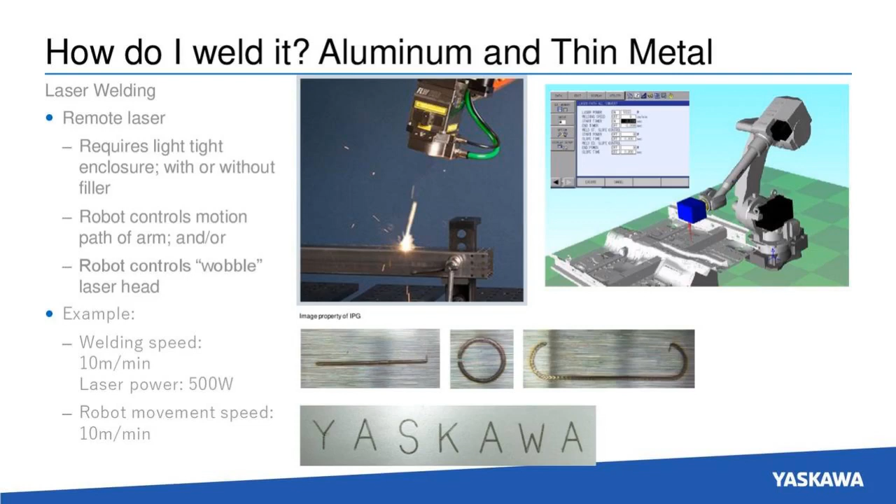So you can kind of see here, you can do different weld seams, very narrow, small weld seams, even writing Yaskawa or serial numbers, whatnot, into place. So again, more and more popular for aluminum thin metal, as well as some other metal materials.

Lately, we've also seen a gradual increase for laser seam steppers. So this is also using a laser. That laser head is inside of what they call a picker gun or a C gun, and it does not require a light tight enclosure. The laser head comes down to the part, and then on a C gun, the other side of the gun applies pressure, similar to what you'd see in resistance welding with a spot welding gun.

But a picker gun actually is only one-sided, so the tooling is what's helping apply pressure to the part. So if I have a large van floor, for example, I can get into the center of that part without having a large specialized gun. It's a very fast process, and there are no consumables in it, which is nice. So I don't have to dress my tips like I would in spot welding. But again, I have a higher rate of control with that.

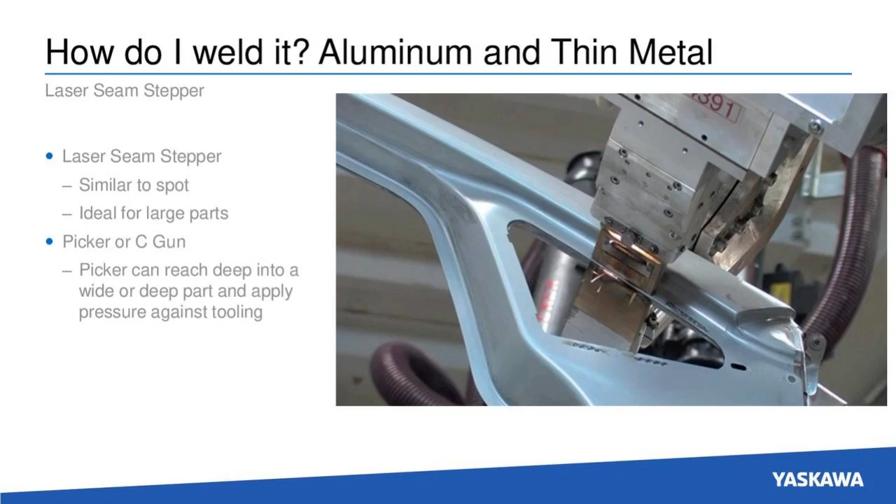Also, more and more, especially in automotive, dissimilar metals are being used. There's a variety of ways to tackle this. Again, we mentioned that in the MIG process. You could also do that with brazing, with silicon bronze typically used as your filler metal. You could use the laser that we mentioned with that seam stepper. That'll work on certain types of mixed metals as well.

Friction stud welding, which I'm actually spinning perhaps a steel stud onto aluminum or two different types of steel into place. One, though, that I wanted to touch on here that you see this large gun in the middle of the screen and the diagram on the right is flow drilling. So we hope to have a demo of this also at the trade shows this year. But I'm actually using a mechanical fastener, so the screw spins up very fast through the two different dissimilar metals. In that spinning, it actually creates the molten pool, so I get some flow there.

And then as that pool cools, the fastener is fully inserted around that fastener. So the pool is actually creating a tighter joint than I would just by screwing a fastener into place because of the rate of speed that it's being used at.

So this is being used - I've seen some applications on ladders, but in automotive engine cradles, battery trays, I know in some circumstances, but more and more this is being used. Again, you do have a consumable, you do have this screw fastener in place, but it's a little simpler and quite a bit lower cost than some of the other methods.

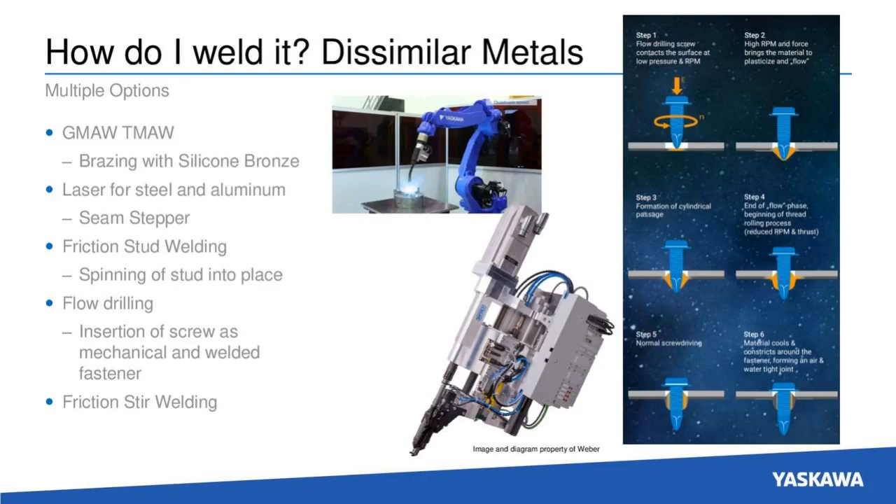And then lastly, for dissimilar metals is friction stir welding. This is also kind of a newer process we've worked with ESAB quite a bit on. I'm using a non-consumable sort of router bit that plunges into the two dissimilar metals or similar metals, spins at a high rate of speed, applies pressure, travels along that weld seam, and joins those metals.

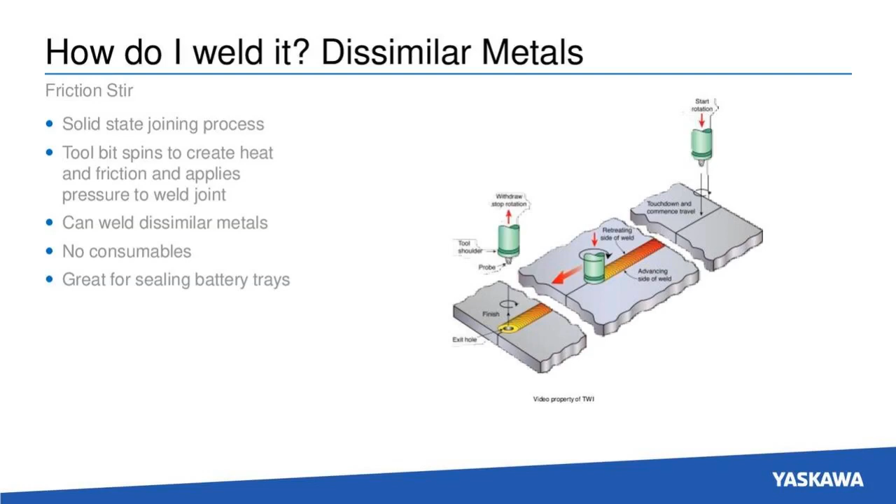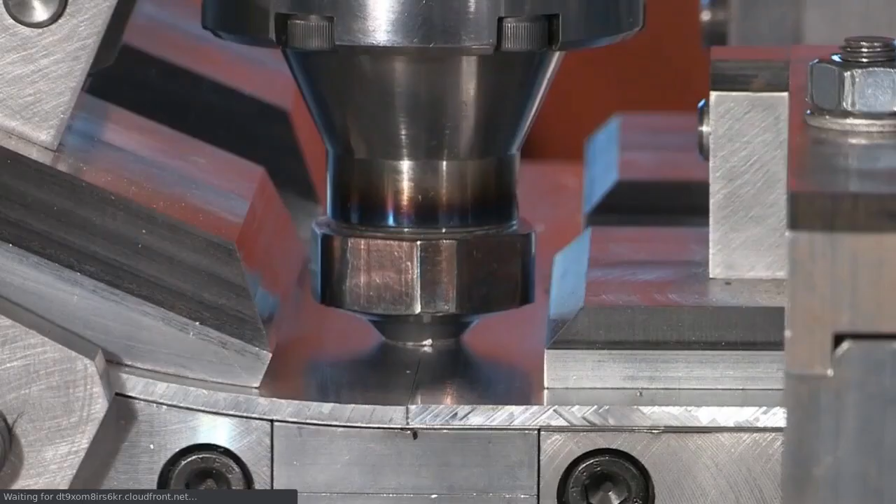I do have a video demo of this as well to give you a better idea of how that works. In this case, you'll see it plunge and just come straight toward the camera, plunging into the two metals. The weld profile of this, if you do an etching, is almost like a spiral, like a cyclone between the two. So it's kind of a unique way of joining those metals as well.

Back to the slide here.

So lastly, I want to cover, as far as with these advanced materials and different size parts that we're seeing, more and more mixed processes are being used. So I no longer necessarily have a cell for adhesive, a cell for spot welding - that's becoming more and more combined. So maybe I have to add spray foam for insulation on a car door panel, but I'm also going to be tacking and welding that in the same cell. So that's happening more and more. I can also do inspection at the same time.

All that's happening, so I'm eliminating some cycle time there. I'm eliminating different cells, I'm decreasing my overall footprint for the different machinery being used. So trying to combine all those processes into a single cell or a single line as possible is going to achieve a lot of efficiencies.

Also with that, we're starting to see more and more - I'll touch on briefly here - laser ablation. Different uses: the military was doing a lot of R&D on this to actually remove the outer coating of airplanes so they could inspect them. So it's using a laser that's basically just powerful enough, just hot enough if you will, to burn that outer layer off.

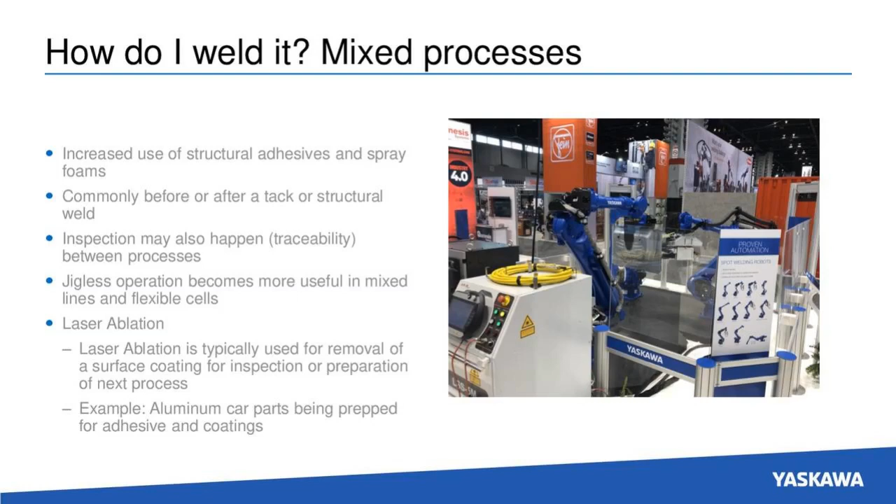So that is all of our slides today. Again, a lot of information - I know a little time there, about 40 minutes.